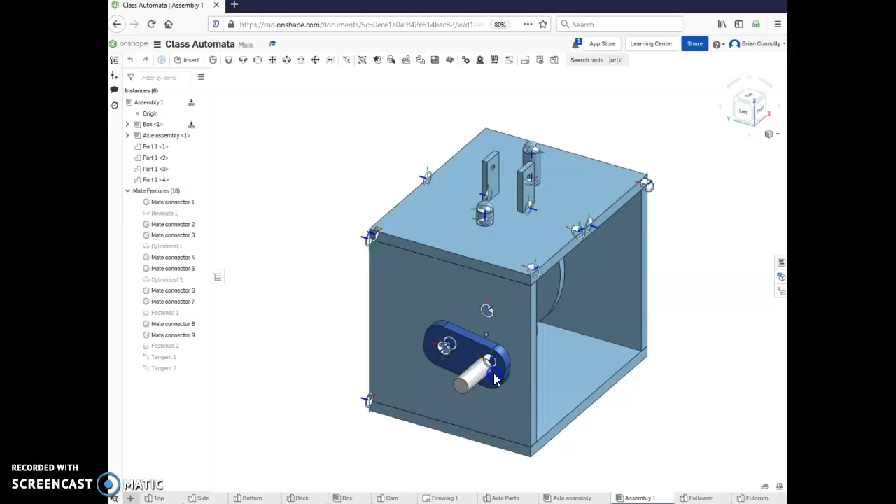In this series of videos, I'm going to go through how to create and assemble the Automata project. One thing you'll hopefully have at the end is an assembly that rotates and moves the way the actual project will move. So you can see I can rotate this handle. My cams rotate around the axle, and then I also have my followers that move up and down.

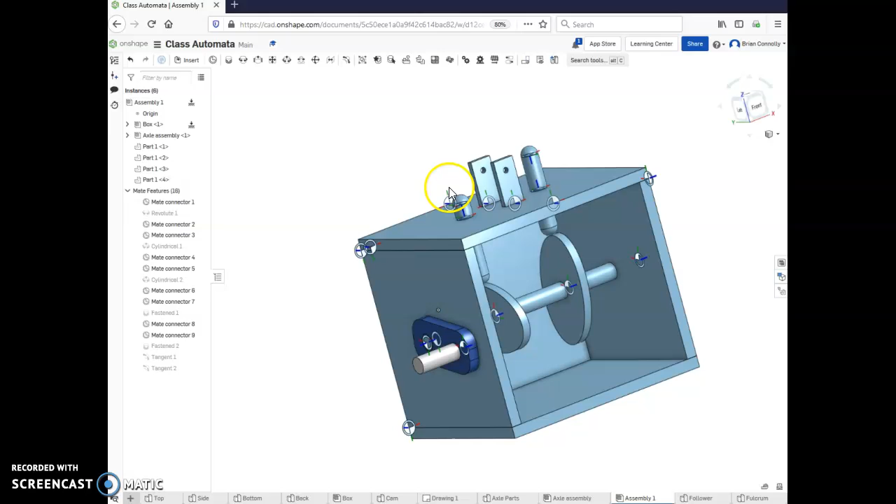Now this is not quite a complete assembly because I don't have the seesaw quite attached, but it's pretty close, and I'm going to show you a quick, as easy as possible method for getting this. I'm not going to go through how to make all of those parts—those were covered in earlier videos. What I am going to show is really just how to assemble, and maybe a little bit of how to put things together and measure if needed.

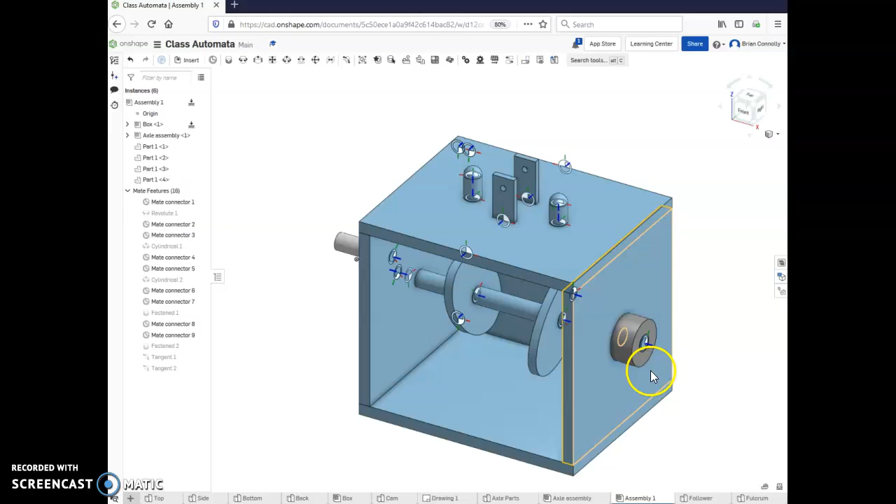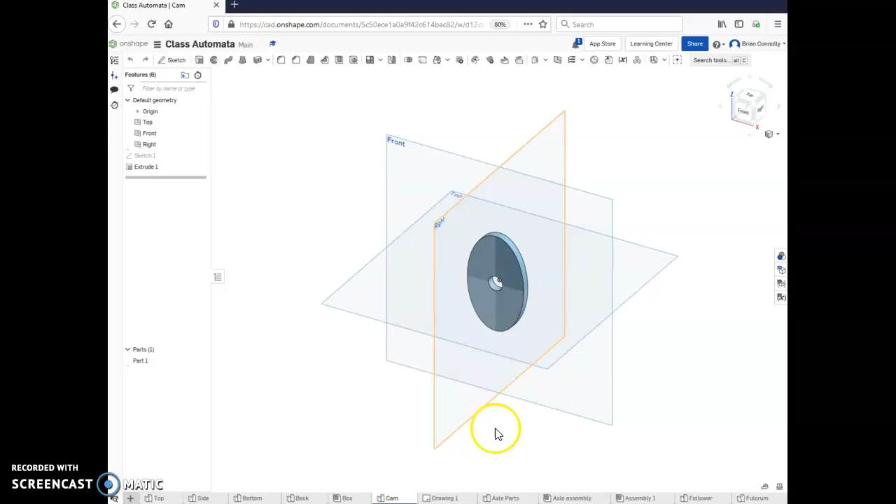Sometimes we've got to measure things. So I'm going to assume that you already have all of your parts, whether those are in single part studios or individual part studios, that's all good. It's possible you may have to build or create a couple of those parts on the fly. You create it, you put it in right away, and it's all good.

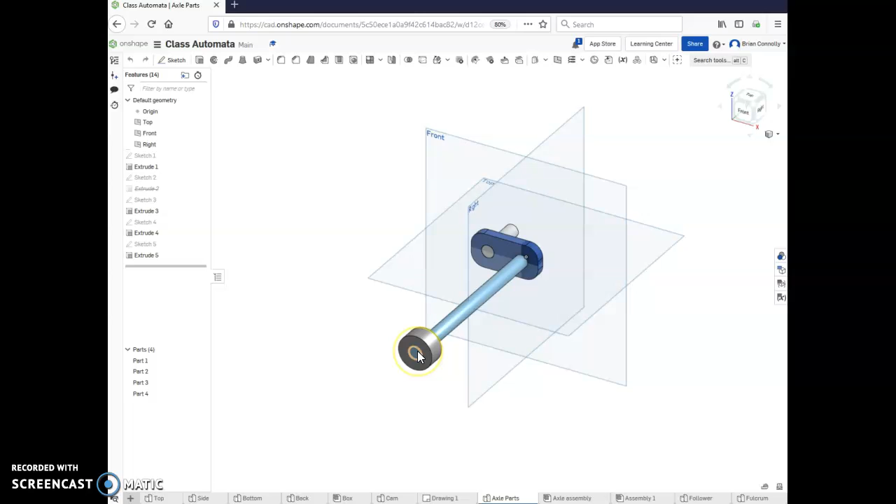High-level overview: I'm going to show you how to create a couple of sub-assemblies, which is just an assembly that you then put into another assembly. So I've got my axle assembly complete with cams. I also have my box assembly that I can create as a separate assembly and then glue that all together. I can do the same thing with my axles for the most part, and then from there put those two parts together. Engineers do this very often, so sub-assemblies are very helpful.

This is like when automakers make the dash of your car—they then put it into your car. They don't put all those parts and pieces in separately; they make them all together and then at the end put it into the car. You might see this with a house as well. You'll build a wall, put the wall up. Somebody at the factory created a window, you then put that window into your house. So you've got a sub-assembly that goes into the larger assembly of your house, your car, any of those manufactured things. Often we use a sub-assembly.

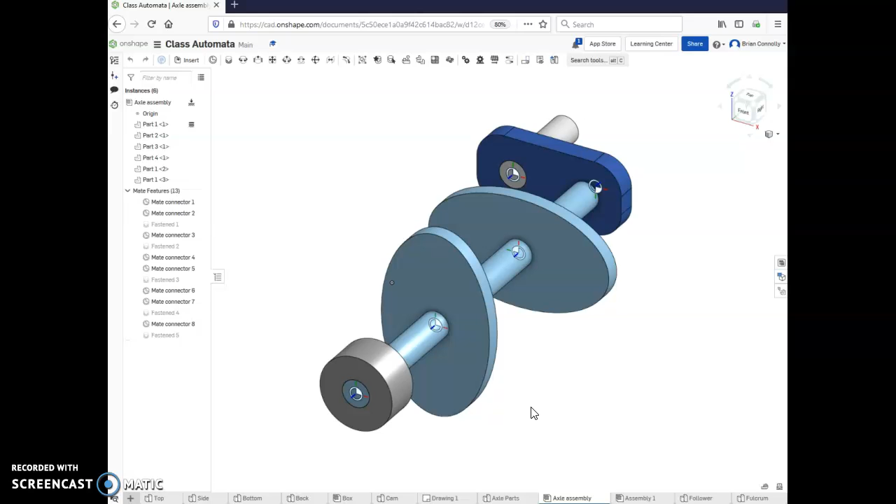Anyway, so for this, I really just want to talk about the parts and pieces, and then the next video will go over how to put them together.

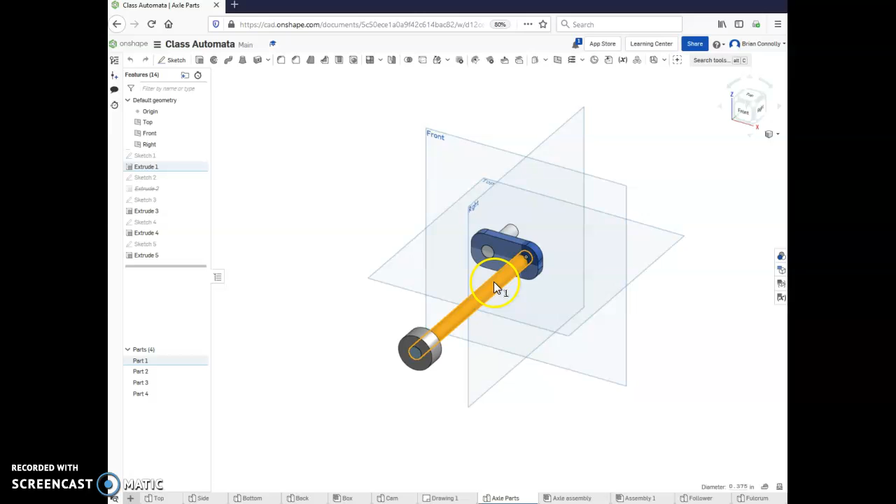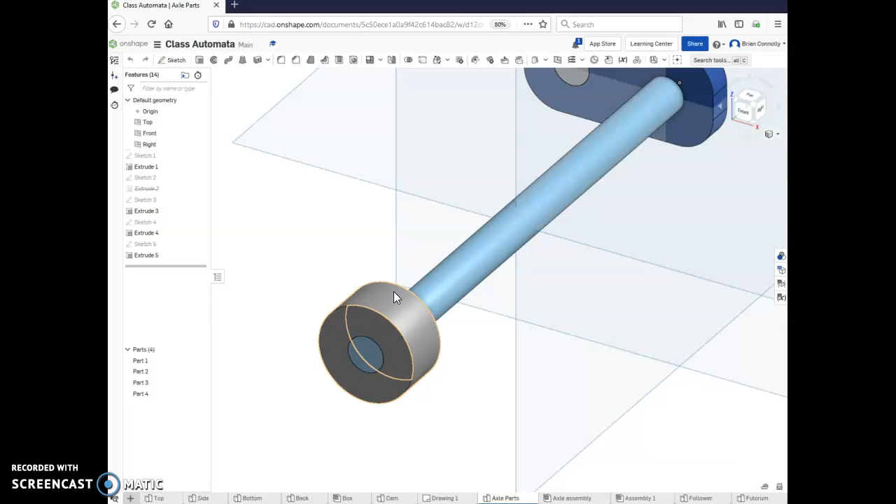I created an axle, and you'll want an axle that will then go through the box. This hole right here is actually the same diameter as the axle. You'll also want some way to stop it from sliding—so right here, this is circular. It doesn't have to be circular, it can be square, really any shape you want. It's going to be a part that I can glue in, that has a certain thickness. In this case it's 1/2 inch because I know I have 1/2 inch material, and I know I'll be able to drill fairly easily into that.

The other part over here is 1/4 inch because, again, I have 1/4 inch material, and I know I can actually laser cut this fairly easily. It just has 2 holes in it and allows me to turn this crank, which offsets that axle. And then here is just a little handle. Again, it doesn't have to look exactly like this—this is just a fairly quick and easy way to do so.

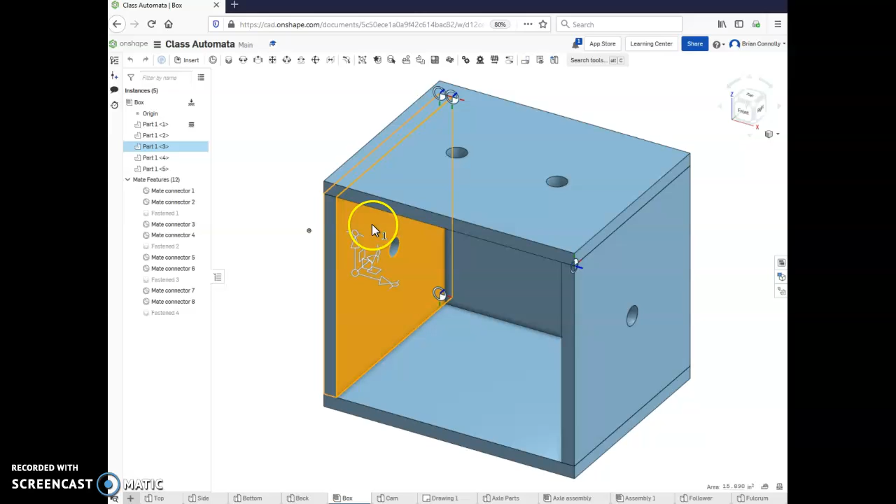For your box, you're going to have 5 different parts in the assembly, but two of those are exactly the same, so you only need 4 part files. I have one right here that is the left-hand side, which is exactly the same as the right-hand side, so you only need to make one part in CAD. Then we have a top with a couple different holes—if you have 3 cams in yours, you're going to need 3 holes and all that. So we use the cams.

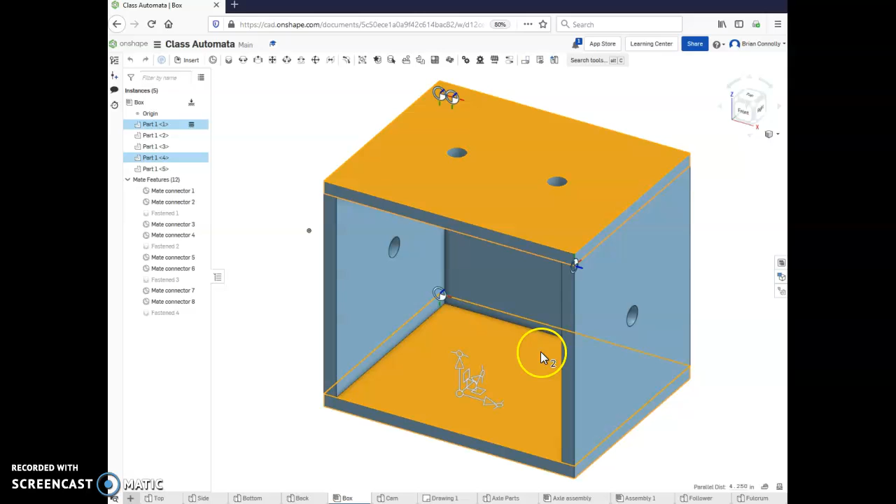These are for our followers to go through. We also have the bottom, and since there's no followers or anything going through that one, it's just a solid block. Then the back gets inset here, and that is just, again, a solid rectangular prism, 1/4 inch thick. I can very quickly and easily cut these, no big deal. So far, at most I have to make 2 cuts, then drill a hole, and I've got it assembled.

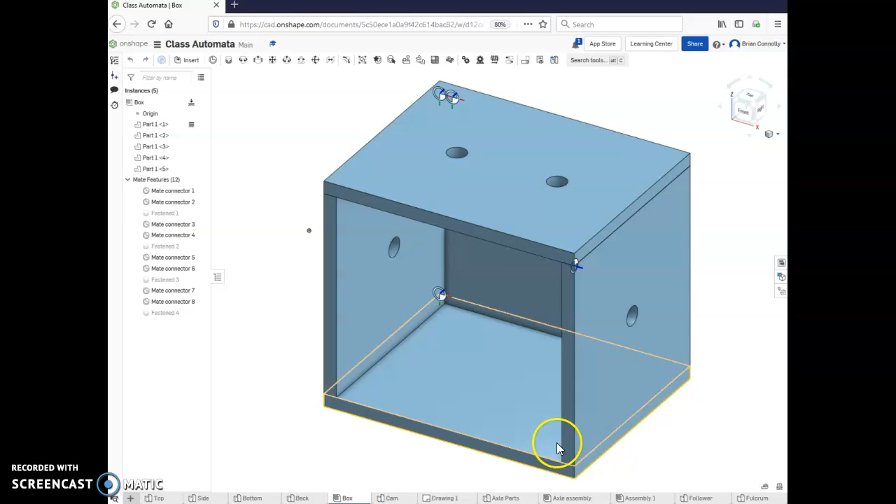Same thing for my axle parts. In the next video, I'll show you the assembly.